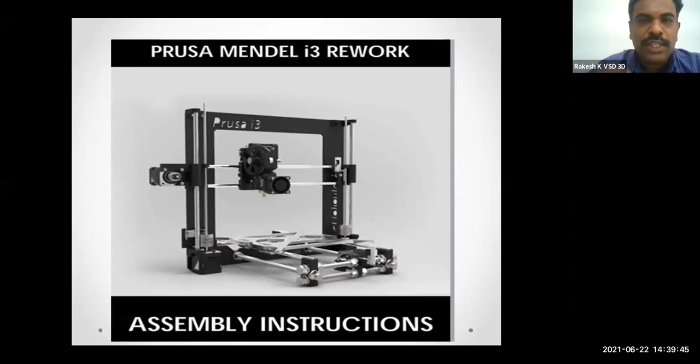We hope my screen is visible to all. This is a Prusa Mendel i3 rework assembly, a Prusa i3 printer which I am going to show step-by-step so you can manufacture it yourself. This is a very simple procedure. Some parts have to be manufactured using another 3D printer, and some rods or other components you are seeing can be manufactured through CNC, cutting machines, or lathe machines. There are some frameworks which we have to manufacture.

The picture we are seeing right now will be the final outcome which we will be manufacturing. This is a very slow process, not an interactive one. We get the parts, take them, and assemble them, and each assembly will have its own importance in the 3D printer system. So follow the step by step procedure with keen attention.

Just to understand 2D to 3D: you have all seen 2D printers like an HP printer. You print one Word file and get an output. If you print the same file again on the same paper, imagine one more layer of printer ink being added upon the previous layer. Layer upon layer increases like that to form the object. So the ink layer increases and forms the object.

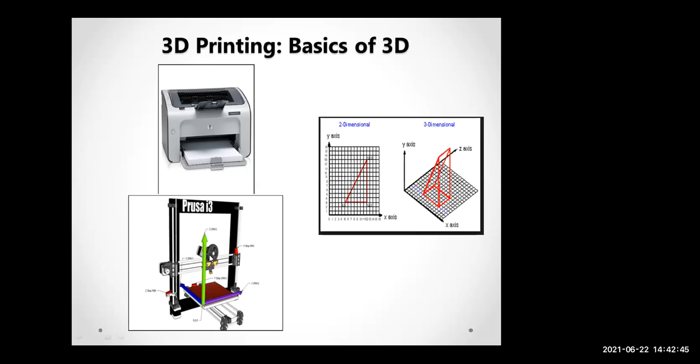If you see in the screen as my mouse moves, once the raw material wire is inserted into the nozzle side, this motor pushes the material, and it forms the object. So there are X, Y, Z axes, three axes I'm talking about, and the fourth axis is the extruder motor.

All these axes, X, Y, Z, and the extruder motor as the fourth motor, are connected to the connecting rods. You can see the connecting rods in the screen. All these connecting rods and NEMA motor movements are coordinated to the Arduino motherboard, in the electronics. The material and all of this in combination will be connected to the motherboard. So each axis has one motor and one extruder motor, and all of this combination connects to the Arduino motherboard.

So this complete process, the X motor, Y motor, or Z motor, in a very simple way we divide these parts into mechanical parts, electronics parts, and also motion related parts, meaning movement related parts. All these parts in combination will help us develop one printer, and like that we will finally get the 3D printer in production.

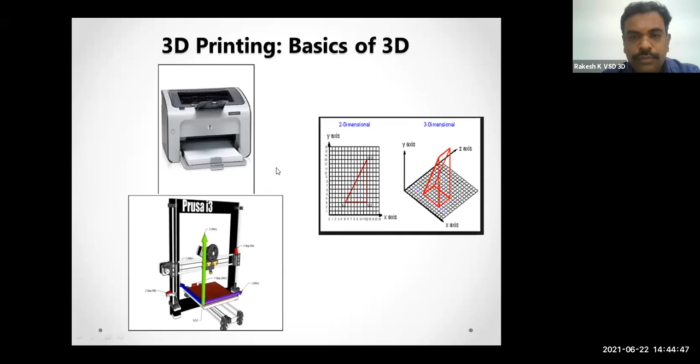So just to start with, this is a simple Prusa i3 3D printer. This version is a very basic version. I have selected this one because if you understand the basic 3D printer, you can automatically and easily understand any 3D printer globally.

You see the X-axis motor, Y-axis motor, and Z-axis motor, and these axis motors are connected to the motherboard. You will also have the bearings, and this bearing assembly will be connected to the nozzle. So that's the sequence you'll be having.

In this version, the features will include the magma hot end, idler tensioning systems, idler end stop holder, and upgraded extruder idler. There will be certain small parts like this.

So here again, same screen, X, Y, and Z, the three axes I am talking about. Just keep this picture in your mind, because I'll be coming back to it again and again as we go step-by-step through which part we are manufacturing. In this screen, I am going to tell which part right now we are manufacturing.

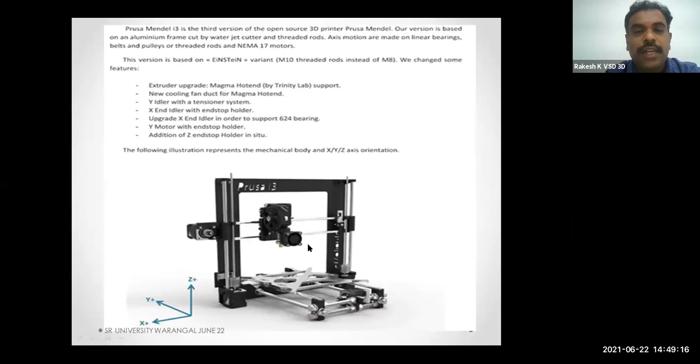One is the 3D printed part, second is the extruder set part. What is this extruder set part? In this, we have certain regularly available parts and some 3D printed parts. The 3D printed parts are the Wade extruder body, extruder idler and fan duct, Wade small gear, Wade big gear, and this one.

Again, the magma hot end, thermistor and resistor, hobbed bolt - these are regularly available in the market, where you can purchase 8mm diameter smooth rods of 320mm, 350mm, and 370mm lengths. If you go and ask, they will give you these.

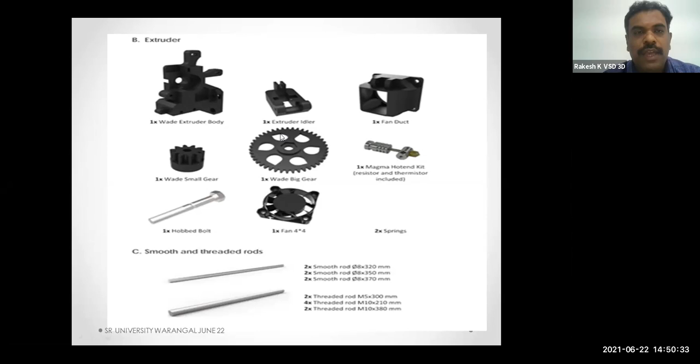And also you will be having the threaded rods of M5, 300 mm, 210 mm, and then 380 mm. Like this, each and every assembly which we talk about in this sequence, this is called bill of material.

In our regular process, before we manufacture our printer, we set up what all requirements are there. If you come to the next assembly, the set of parts we talk about are bearings, couplings, ball bearings, NEMA motors, belt, GT2 pulley, and these are one more set of parts which we buy, not manufacture, and these parts are required as an assembly system.

Each and every part has to be fitted equally. Like this, we have a set of parts which we have to purchase. In regular mechanical market only we will buy, we can get all these parts. So nothing is something new you have to buy, everything is available in the market itself.

LM8 UU linear bearings are regularly available. And if you go to the coupling, 5 to 5 couplings are always regularly available. Ball bearings number 624, 608, and NEMA motors, which are regularly available in the market. So like this, you have to purchase these materials also.

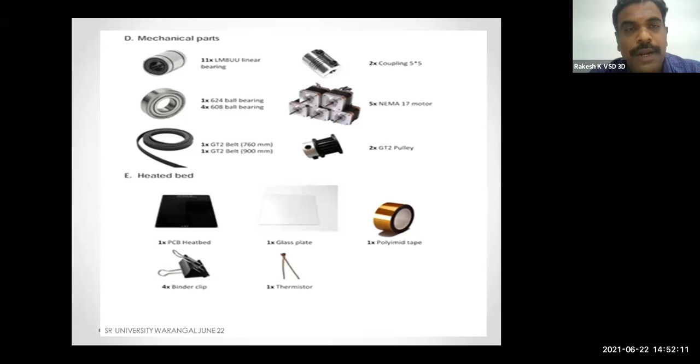And next one is heated bed, where your 3D printed component will be 3D printed. So you see, for the heated bed, we have only very few simple binder clips, polyimide tape, thermistors, glass plates, and PCB heated bed. Like this we have. So these are regularly available parts.

These are the stoppers which stop the printer from moving in the x-axis, y-axis, and z-axis. If it is rotating continuously, somebody should stop the motor to stop at one point. So that is end stops, or connecting rod, connecting cables, which we need to purchase.

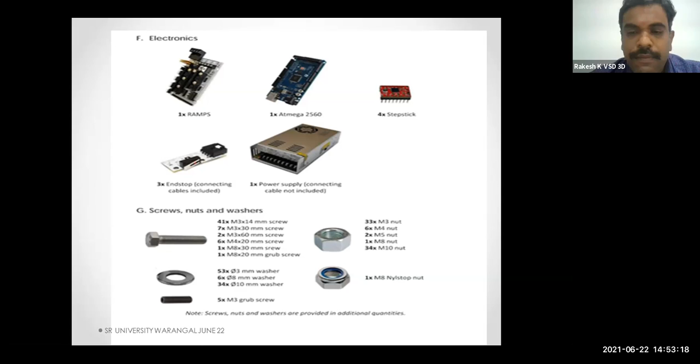And next one is power supply. This is a normal power supply, we take it from regular systems. And next is screws, nuts, and washers. Regular mechanical guys know well about it. These nuts, before we start manufacturing, we keep ready in step-by-step procedure while we will be taking this usage in our process of manufacturing a small 3D printer.

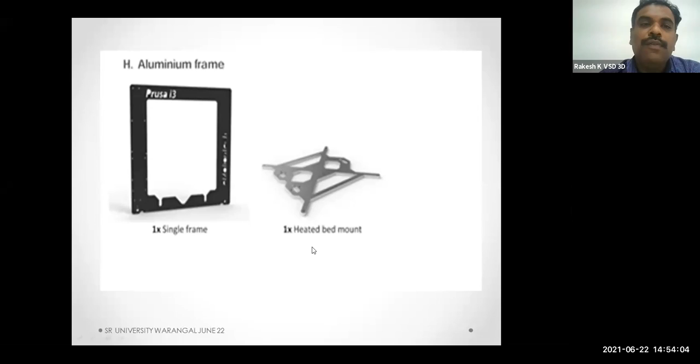Next one is, this one is aluminum frame, students. Aluminum frames. These aluminum frames can be purchased directly, or these can be manufactured using lathe or CNC turning machines, where we can take that particular frame and ask them to design as per our thing, meaning they can cut as per our design. So like this, aluminum frame, single frame, and then heated bed mount, which we get from the regular market itself.

Fine, so now students, we will go for FDM. Sorry, I'm telling you students, we'll go for regular sequences: y-axis, x-axis, z-axis, and then extruder motor. We will add the sequence slowly. So we will develop, because we are assembling one part by another part, we are going to take it up.

The images, I tried to give you as much quality as possible, but still we have this issue, I don't know, because it is an image, a PDF file which I have converted. I got it like this, so I'll try to show you the images as good as possible. If you follow the images, you understand what exact part we are working at.

Okay, first and foremost is y-axis. Why y-axis? Y-axis is the one which is bearing the complete 3D printer. So behind, I have my printer with me. I'll be showing you what this printer is all about, and also I'll try to show you this printer to make you...

...clearly visible. So first of all, I am talking about this x-axis. Okay, this is x-axis. This x-axis, this is one top-end model, that's why everything is closed here. If you see, there will be one frame beneath.

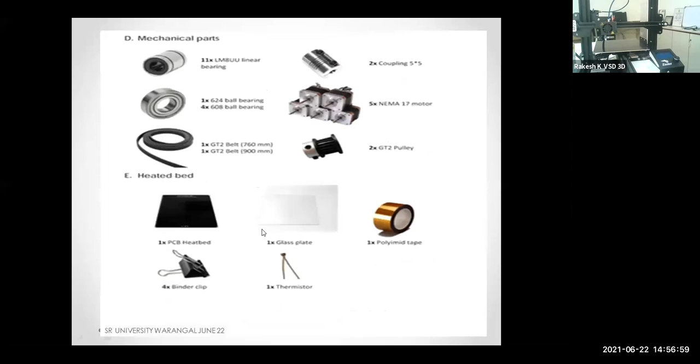This document which I am showing will be taking all the parts which I have discussed from this BOM only. In this, it has taken the heated bed, this frame, and this heated bed mount. On that we have added the Y belt holder, which is this one, getting fixed. And then you have the Y belt idler also. In this sequence you can see the Y belt holder, and also this Y belt axis thing, which we will be fixing.

First and foremost, frame, and on that frame we have fixed the part. And next, transverse. See, in the printer which I am showing, this is bit closer to a printer. So this is a semi-assembled printer. Actually this is called an Ender machine, which you are seeing.

This will help you understand better. If you see here, you will be having this motor. This is the Y motor, and this is the axis. So here the Y axis will come and touch here. That's it. There will be an end stopper which will stop this from going beyond this point.

So you will be touching it and then it will be stopping. So there will be an end stopper here, and also an end stopper here. Two end stoppers will be there for the Y axis. This is Y, this is X, this is Z.

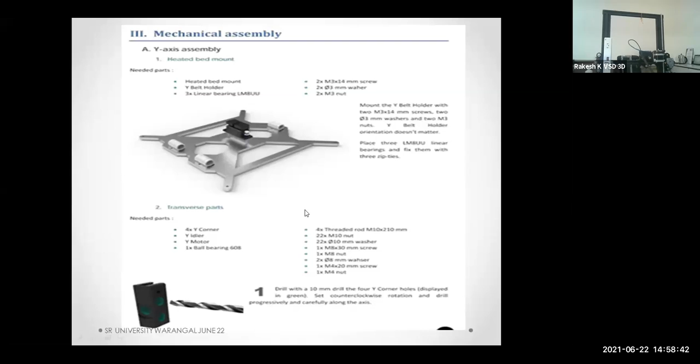So this part which I am talking about, the transverse parts, this transverse part is the one which will be coming at this level. Just to make you understand more, I am going to the next slide.

See, we have these black ones which I am showing in the image, already 3D printed. Those parts are readily available. In that readily available part, we are just fitting this M8 and M4, M4 nut, and also the 608 ball bearing is being fixed inside this particular part.

If you see where this part comes in the printer, it will be coming beneath the printer. This side you will be getting it, this side you will be getting it. So after this, there is one more.

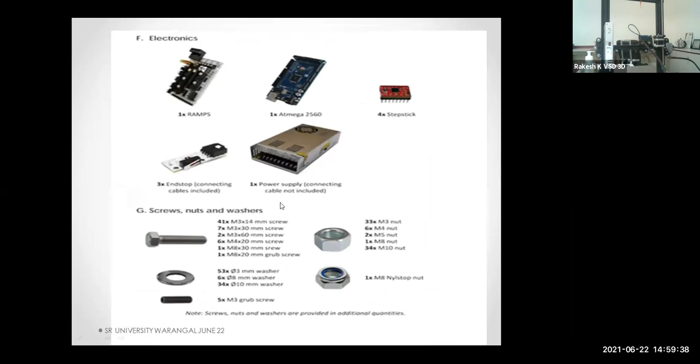These rods, if you see, we have multiple rods being developed. So each rod, after this, we are going to get our rods which I told you now. In these rods we have smooth rods and threaded rods, which I have shown you in the BOM.

That particular rod will be inserted into these parts. This idler, and then the Y bolt will be tightened, and then we'll be inserting and fixing this with a certain distance of 30mm. Why 30mm, we'll come to know in the next step, because when the printer is moving it needs to be fixed with this frame also. If that frame is required, we will use these rods with certain distance, and lock the nuts. So after that step, we are adding some more parts into it.

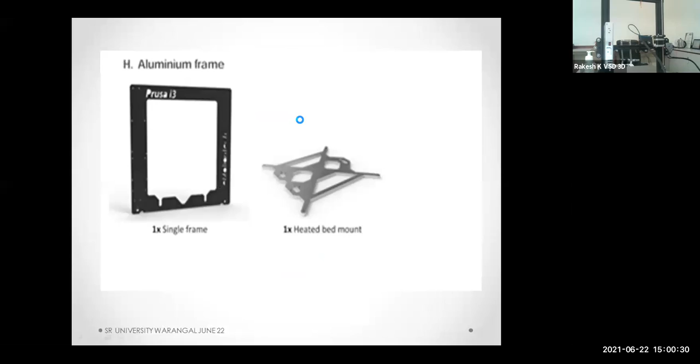Some more part is this one, which we have discussed in the 3D printed first slides itself. I have shown you these parts. This is the one, Y motor controller. This part, next step we are going to take.

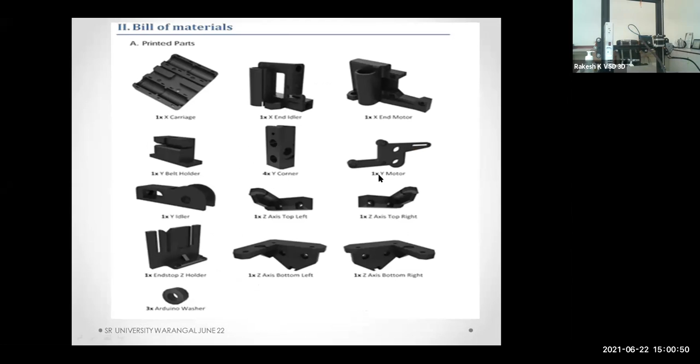First we have taken the belt holder, next the Y corners, we have fixed it. And then the Y idlers, we have fixed. And then now we are fixing the Y motors. And then you see the Y motor here beneath.

This setup which we have done here is different, and this which we have done is different. You can see this side idlers, and then we have this complete idler. So this one set and this one set, two sets we are talking, not a single set.

So what next? We have to take these rods and maintain a certain distance. How can we fix these rods? I have given you two particular ones, in the previous slide you have seen, we have developed two rods that are transverse slots, and they will be in the horizontal direction too.

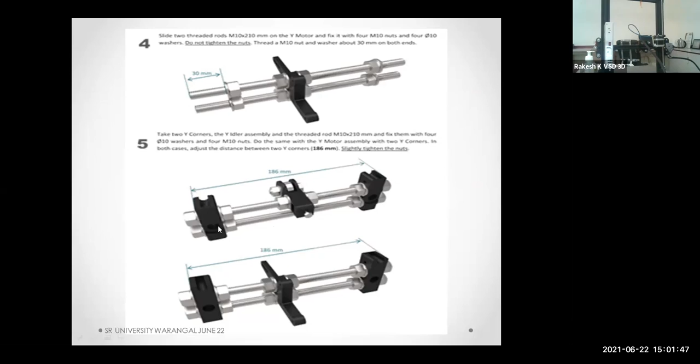In the two horizontal directions you have seen, and then some rods will be going in the perpendicular direction. You can see in sequence 5 here, whatever we have taken in the rods, we are now fixing the perpendicular rods. These perpendicular rods, first it was developed like this, now we are fitting like this, these two rods.

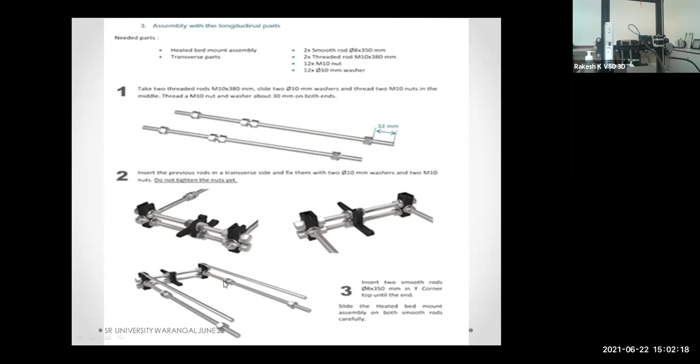These two rod sets become our left side of the screen. You can see the rods being fitted, and finally our frame which was developed on the first line, that is the frame beneath the printer which I have shown you previously. This frame, where your heated bed is moving, this small frame is beneath it. Internally we will be having one frame.

This frame is fitted on the complete axis. This is looking a bit different, this is a semi-assembled printer, which I am showing you for your understanding, to make you understand what I am telling. The Y-axis assembly will be looking like this.

This is how the complete Y-axis looks, because this Y-axis is the base area which will be taking the complete load. That's why Y-axis fitting is a bit complicated, and your transverse rods should be into the exact position, or your parts may get cracked if the system is not fitted properly.

So this is the Y-axis assembly. As I told you, first is X-axis, second is Y-axis, next is Z-axis, and I'm going to integrate each part, and then finally you will get the printer out from that. So the sequence follows from one stage to the other stage. So like this, you have already seen the Y-axis.

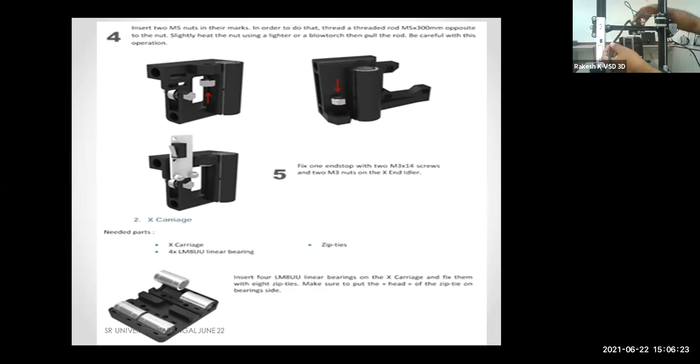In X-axis, we have our carriage also, where I told you about the carriage system. This part is fitted to these particular rods. So this carriage system, whatever you are seeing, this is just for your understanding, I am showing through video. This carriage system is there in X-axis, so in X-axis we have to fix this carriage way also.

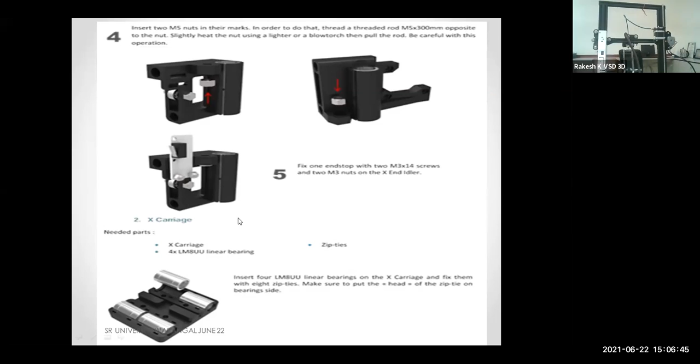This carriage way, if you see, contains the complete carriage and also 4 LM8UU linear bearings. This system is different, but in this system, the X-axis manufacturing will be like this. As I told you, X end idler on this side of the part, and also X end motor assembly on the other side. This side you have the motor assembly, and this side you will be having the end idler assembly. So motor on one side, idler on the other.

So how these two will be manufactured is, you can see here, X-axis rods, in the first sequence itself I told you, you have to maintain the dimension of 345 mm. In between, we give this carriage system, and the sequence given is 1, 2, 3 for the carriage.

After this first end idler assembly is done, then you have to add the carriage. Afterwards, after the carriage, you have to get into the end motor. So these three are in sequence in our X-axis, because as I told you about X-axis and Y-axis also, this sequence has to be followed. And finally it will be fitted to the system, where the frame will be fitted to the parts.

Next, the frame will be fitted. In a single frame, we will be having the x-axis assembly, and we will be having the z-axis top and z-axis bottom.

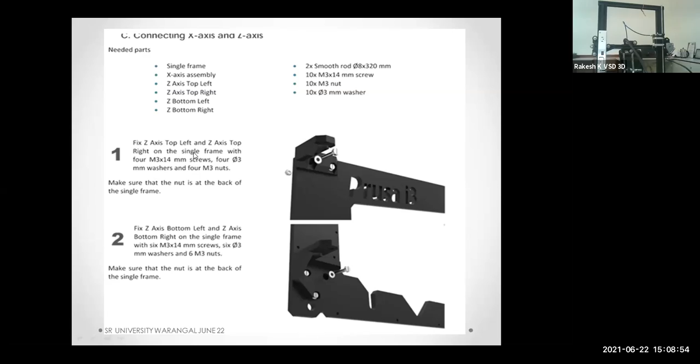These two, z-axis top or z-axis bottom, we fit like this. If you see, like this, it will be looking.

From the left side, we see - don't imagine this is semi-assembled. As I told you, what I am sequencing is the assembled, step-by-step assembly. This is a semi-assembled printer which I am showing for your understanding. So these two rods are fixed right now.

The Z movement axis motor will be moving this Z axis from top to bottom. There will be an end idler and also an end stopper. These two will be connected, and the rods that are there will be connected in this sequence in the Z axis.

If you see here, this Z axis, you will be having the coupler assembly. What is this coupler assembly? In the Z axis you will be having the end stop Z holder, couplings, NEMA motors, threaded rods, and even screws, nuts, and washers.

You may feel this Z axis is very easy, but the most critical thing is the Z axis is very tough to handle, because the alignment should be very parallel or perpendicular. If the coupler or these parts are not parallel or perpendicular at 90 degrees, the printed parts get cracked, tension increases inside the parts, and there is a chance of collapse of the complete printer.

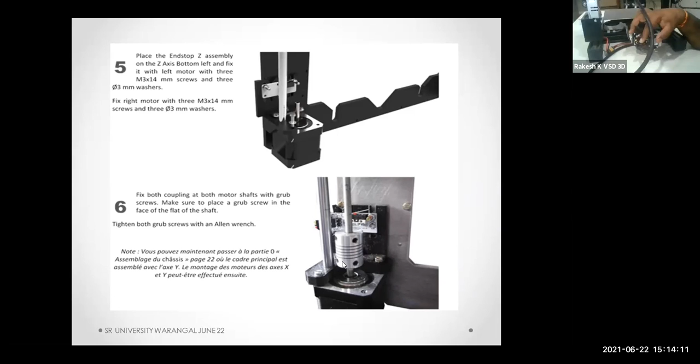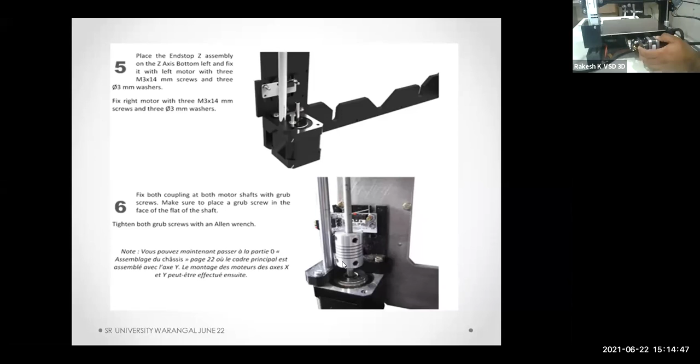So like this, motor movement is controlling the axis. Are you able to see this motor movement which I am talking about? The axes, the motors will be connected to the belts, and belts will be controlling the axis movement. Okay, how do we do this axis movement? Next, what we have to see. Fine, okay.

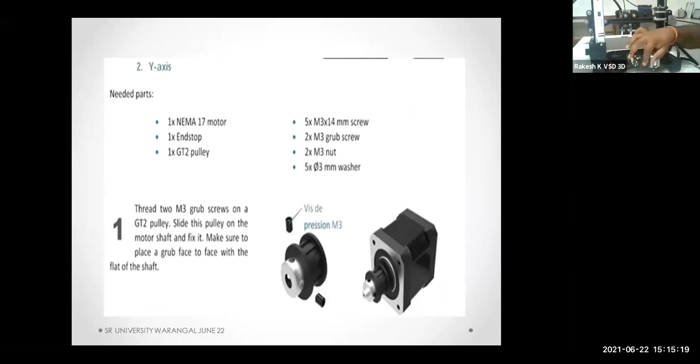As I told you, this motor will be connected to the small grub screw, and the grub screw will be connected to the belt, like this it will be connected. So that's why, as I told you, same image - this is the motor, and the motor will be having the grub screw. So we fit these two together, and after that this will be looking like this.

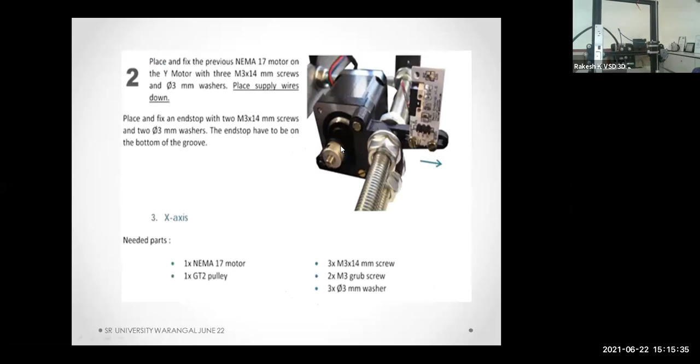And then these motors, X or Y axis - so each axis I'm telling about now. Y axis, first we have seen the Z axis. Z axis motor we fit, Y axis motor, NEMA motor we fit, and then finally we fit the X axis motor. This is the one which will be controlling the complete movement of this particular axis. This is extra motor, don't get confused. This is the motor which will be rotating.

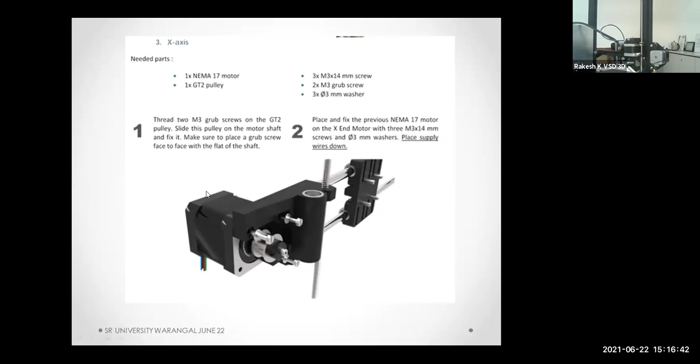So this is the x-axis, which I am showing in the PPT and also the video. Okay fine, so this is x-axis, and next one is the complete things which we have fitted - x-axis, y-axis and z-axis, these three which we have fitted. Now we are going to keep everything into the frame, and finally the picture will be looking like this.

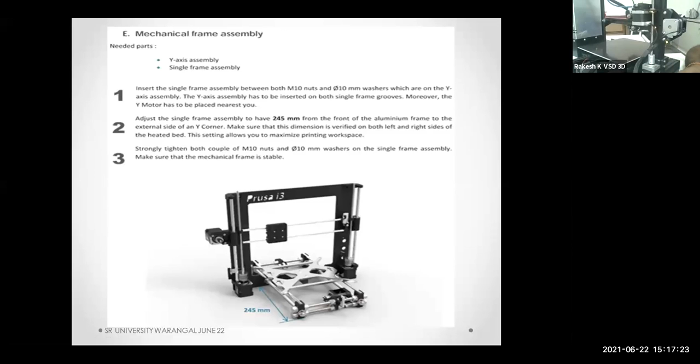So for x-axis, at first a small parts assembly sequence, and then afterwards the next part is the motor fitting. So x-axis fitting, y-axis fitting, and then finally we go to the next final frame which we have prepared. All these three axes will be fitted to the frame. What next do we have to do?

As I told you, the frame belts will be connected, and those belts will be moving the carriage, and the motors will be connected to those particular belts. That's why the motion will be there. That's why the x-axis belt will be connected to each other, and this is the x-axis belt which will be moving. It is in between - this is, as I told you, a semi-assembled one. We'll be having it inside of this frame.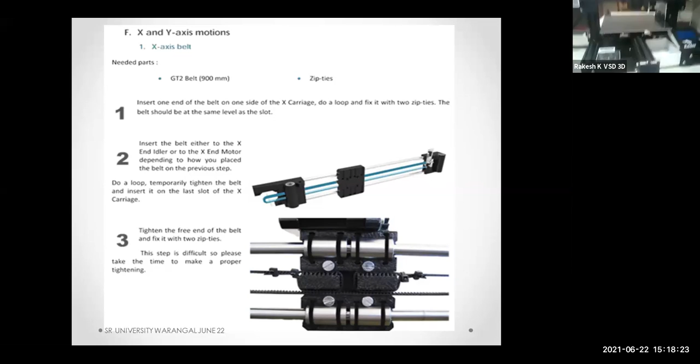When you go to the y-axis, we have this belt moving here. You will have this belt connected to the motor backside. Okay, fine. So x-axis you have seen, y-axis motions we are fitting it. Where this y-axis I have shown you, and we will be talking now about one more area - the bed. This is the bed, this is what I am talking about.

See, this is a simple combination of 4 to 5 parts actually. How will it be? Just see the screen here. There will be a glass plate. Beneath the glass plate, we assemble this small thermistor assembly, which will be having these thermistors - what do you see - these thermistors, 2 thermistors, and then Teflon wire. This is the Teflon wire, which we assemble together beneath the plate like this.

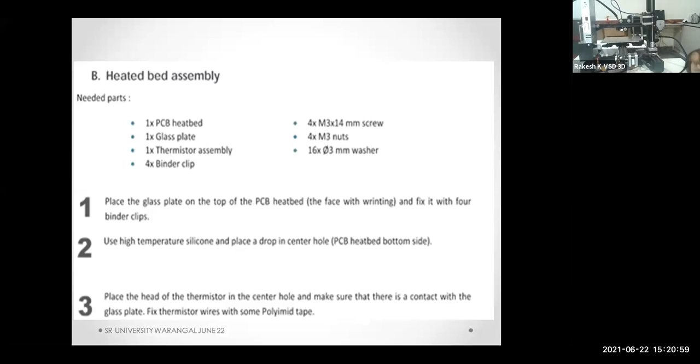Okay, this happens in this sequence. So as I told you - X, Y, Z - and then giving the motion to the x-axis, y-axis and z-axis. After taking the z-axis, the next one is heat assembly. Heat bed assembly, as I told you, we will be having thermistors, and thermistors will be getting the heat sensor, and also the temperature will be increased. After a temperature increase, it will be cutting off after a certain temperature like 100 degrees or 50 degrees. So like that we will be manufacturing the heat bed.

Fine, everything is ready. What about this nozzle area? What about this nozzle area? This is the heart of the 3D printer - the complete system moves around the nozzle only.

You see, this one is very sophisticated. That's why it is looking very smart. Very small one, and it is looking very smart.

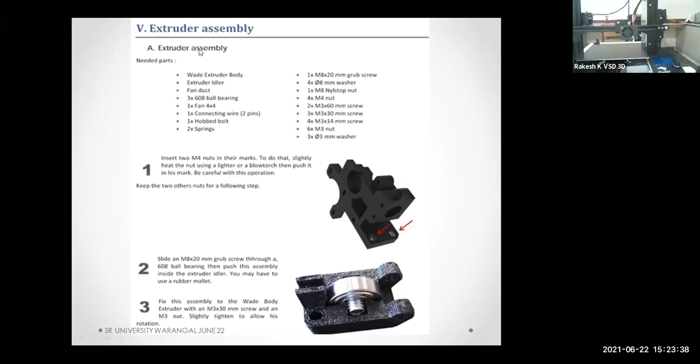Is my net coming, sir? Yes, sir, but it is slow somehow. I'm stopping the video streaming, I think it is unstable now. So I'll open the video as and when required.

If you see this, the complete extruder assembly, whatever we are seeing here, this complete system, this part I am talking about, it is very complicated. We are going to go into a sequence of how we are going to take this.

See, this part we are going to house so many parts, all parts which you are seeing now on screen, like Wade extruder and everything. If this part's step-by-step procedure, if you see here, you will be having a ball bearing. This ball bearing is in-housed into this particular part only. So this ball bearing you are in-housing into it.

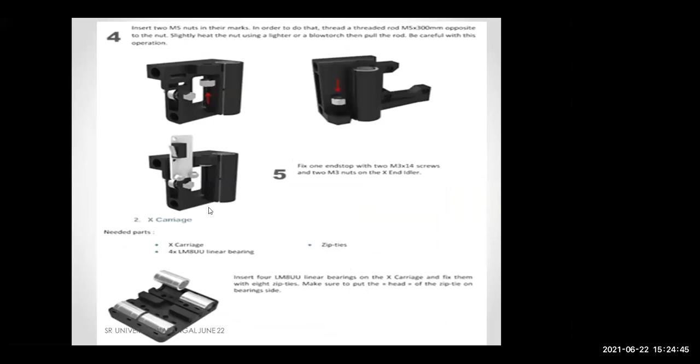See, in the view which you are seeing, we have multiple parts, right? Just we have assembled a few parts. If you see here, Wade big gear - I'll just go into the first screens to show you the extruder set assembly printed parts. So just have a glance at which parts are going to be assembled now.

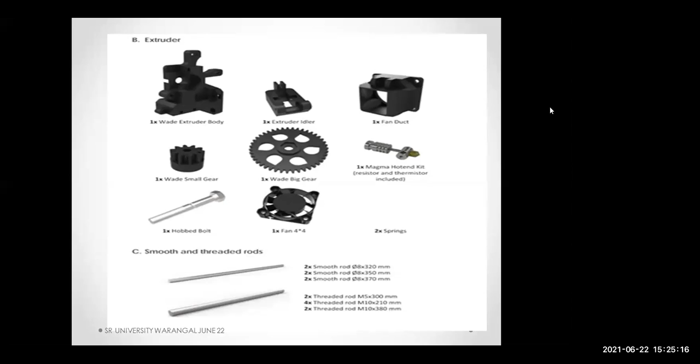Each has 1, 2, 3, 4, 5 - 5 are the 3D printed parts. Remaining are all BOM parts, meaning which we are purchasing. So these parts only now I am manufacturing, meaning step-by-step procedure we are fixing it. That's it.

This part - if you see this screen, first we have assembled this M8 20mm grub screw through a 608 ball bearing, this one. And next is fix this assembly into the Wade body extruder. Wade body extruder is the big one, this Wade big extruder. And next one is inside this - first sequence is we are fitting these things, and second sequence is we are fitting this 3 into 8mm dia washer, which will be fixing this Wade gear.

Actually, what I am talking about in 1.5 hours is a project of 30 to 40 days. They work step by step procedures, not in 1 day or 2 days can we do it. This is a cream which we have grabbed, and we have created this document with so much experience and so much effort. We have developed this document. It is not so easy - what I am talking in 1.5 hours, you can develop this 3D printer.

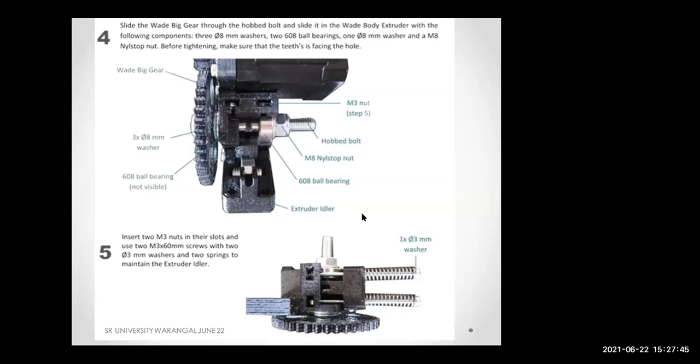Fine, so everything we first manufacture the setup like this.

Once this setup is ready, we have to mount the extruder motor. Also, we have to mount the fan, which is not a manufactured part of the 3D printer. It is a separate housing which we have to make as a major part of the 3D printed part. On that only we have to house these parts.

Nozzle set - what is this? On the left side of the image you have the cold end where your raw material wire will be moving, then the rod where it sequences the material into a straight line, and next is the hot end. The hot end is where the thermoplastic material will be melting, forming into a liquid or glossy stage, and then that material will be pushed into the nozzle, and the nozzle will be delivering the material out.

So who has to push the material? The motor. That's why the motor will be there on the upper side of the system. And who has to cool the extruder end? That's why the fan is fixed at this point. Once the material is pushed from the top side, this fan will be cooling the extruder hot end to the right temperature, and then the nozzle will be extruding the material, and the material will be getting solidified.

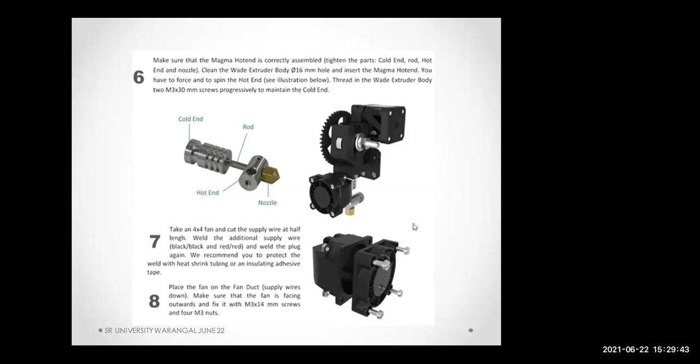So this complete setup, finally we fix the hot end and also the fan along with the extruder motor. These three are fitted at the end of the sequence, so that the complete internal part hosts the complete setup. Apart from this, this complete setup which you are manufacturing has to go into the driveway or x-axis guideway.

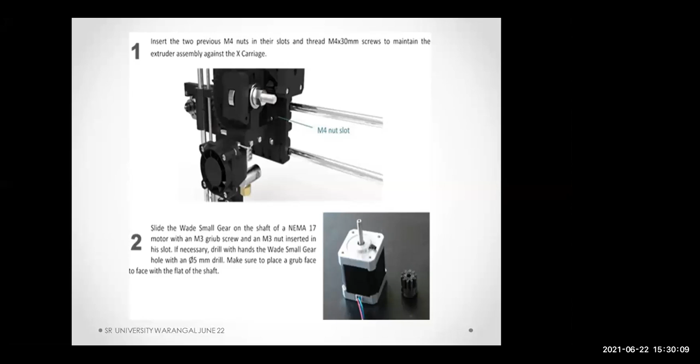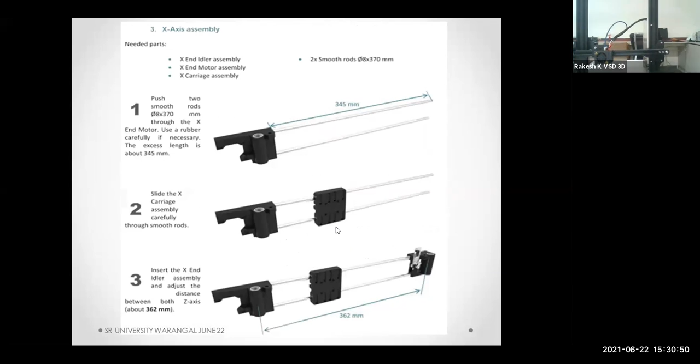So onto this x-axis guideway, we have to fit this complete extruder. This complete set of extruder has to be fixed on the guideway. This guideway and this setup has to completely sit on the x-axis area. So this carriage which we have fixed in the x-axis assembly, this carriage has to host the complete extruder set.

So onto this extruder set, we have to fit the part like this, so that the complete holding, carriage holding, and everything, the load is being taken. So this complete setup of the extruder will be going and sitting on the carriage. Once this carriage is fitted with our regular screws only, it is not a big deal.

But while we are placing the motor - the motor will be there with the raw material going inside. Here you will be having the pulley pushing the material. Once your material is coming like this, it gets pushed like this, inside, and the material comes down.

So as the material comes down in a line from the nozzle, the system should not have high tensioning, nor should it be a loose system. Precision matters at that point, where your material has to go exactly, and the flow rate concept comes into play, where the flow of material has to be controlled at a particular level. The material will be pushed by the extruder motor using our internal Repetier-Host or any 3D printer slicer engine, which we use for our slicing operation purposes.

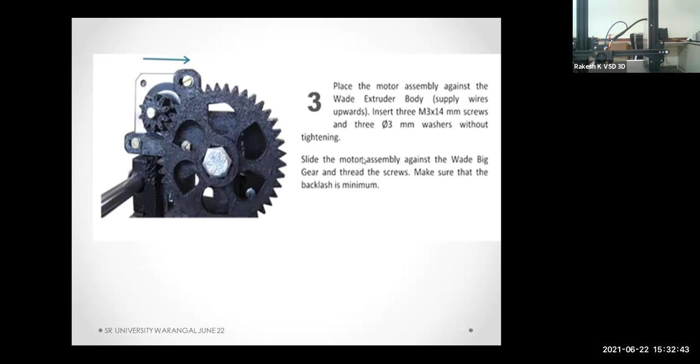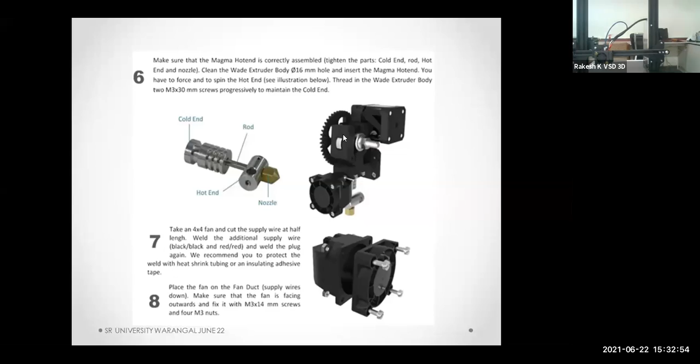So if you see in this assembly, where the material is inserting or pushing, you see from here it is coming in. There will be a small hole where your material will be inserted, and a small gear and then the big gear both push it into the nozzle set, where you will be reaching that particular material.

And how do we get the power to it? A resistor. A resistor - electrical pulse will be generated, and due to the electric pulse, once this induction happens, the heat increases, and the temperature of that particular hot end increases gradually.

As the raw material which we use in our 3D printing is a thermoplastic material, it touches that particular area and liquefies, then comes out of the nozzle slowly, as shown in the figure. It comes down, heated into a liquid stage. The liquid stage comes down due to pressure and gravity, comes out of the nozzle, and layers on the build plate as per our design, whatever we have given in ANSYS, CATIA, or ProE or any other software.

And that particular software will work as per the dimensions or as per our regular inputs which we have given at the slicer level.

So whatever we've been talking about right now was completely about the mechanical assembly. The complete mechanical assembly was discussed, where all mechanical parts were assembled sequence by sequence, and certain parts can be bought from the market and assembled in a sequential way.

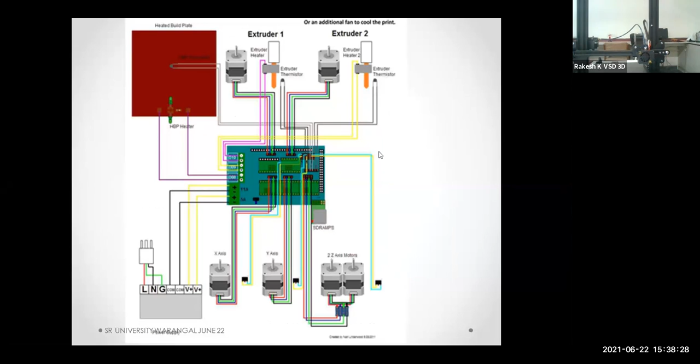So we have connected the X motor, Y motor, Z motor, and also connected the heated bed and everything.

What if the motor is rotating continuously and nobody can stop this motor? How can we do that? There should be a stopper, called an end stopper. The end stopper is the component which gives a pulse or signal to the motherboard to stop at that particular point.

See, here it's going up to this point, and if you see the motherboard, there will be a small stopper here. I don't know how much it is visible.

I'll try to give you maximum. Okay, this is the one which will be...

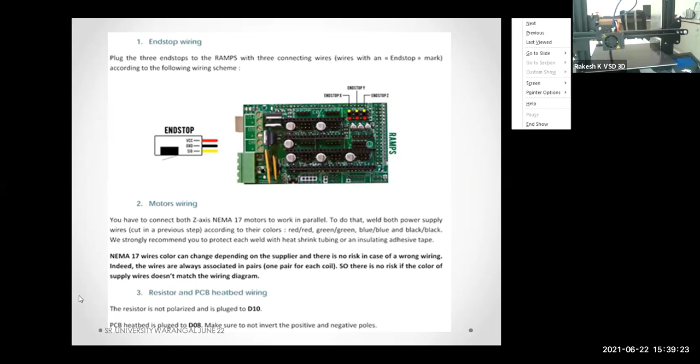This motor is going like this, and then it is stopping here. Why is it stopping? Who is stopping it? This motor is asking it to stop. This is maybe a controller stop, or a machine stop, because the motor will be rotating continuously and it doesn't know where to stop or end. There will be an end stopper. The end stopper's main role is to stop the printer in that axis up to a certain stage.

So end stopper connections are also important in the motherboard. In the top right corner of the motherboard, you will have end stopper for X, end stopper for Y, and end stopper for Z. These three stoppers will be stopping the X axis, Y axis, and Z axis, so these axes will also be connected to the end stoppers. These are the end stopping wiring connections. There's no need to overthink it, but we should have an idea of the complete wiring in the system.

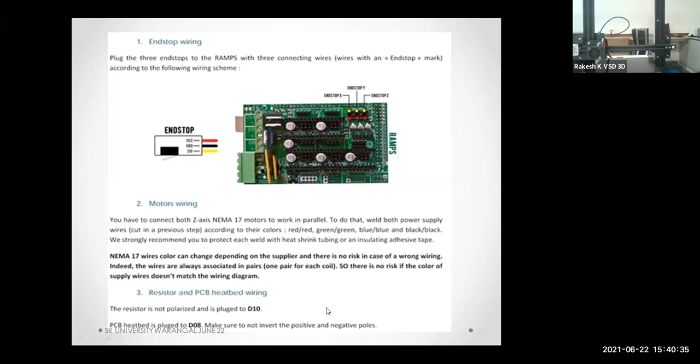Next is motors. The motherboard motors will be connected to the wiring diagram like this, and you have one more in the extruder part. In the extruder, there is one fan which cools the system. That fan also has to be connected to the motherboard, so the wiring has to be given at that particular point you are seeing on screen, a red color point where the extruder fan will be connected, and that fan will be operated as per our slicing sequence and the temperature sequence as per our generated G code.

So next one is power supply. Power supply is positive, negative, simple thing, as I told you.

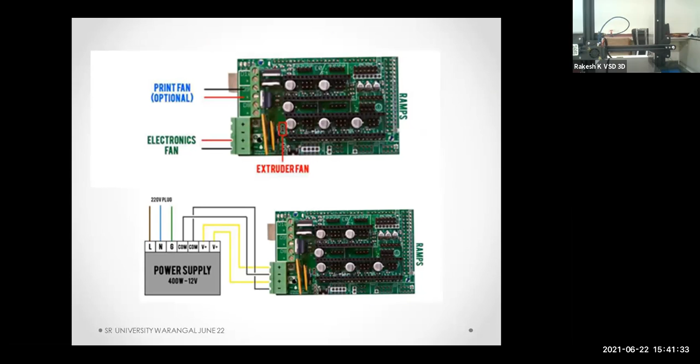So I've discussed the complete components of the 3D printer, from X-axis, Y-axis, Z-axis, connected to the motion systems, electronics, motherboard systems, and the nozzle set we manufactured from the start of the discussion. Simple thing, everything you are seeing is the complete hardware assembly we have done. But always remember, there should be a sequence like this.

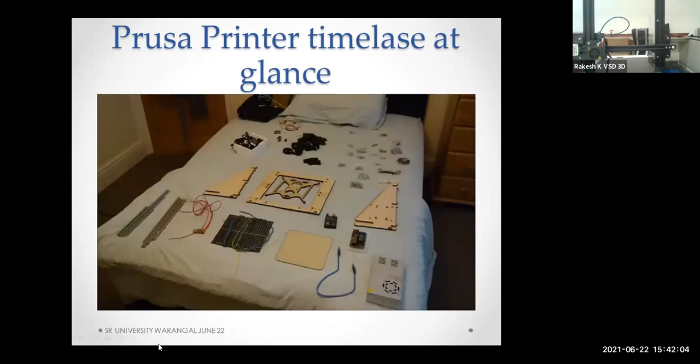Before this, I'll show you a time-lapse video available for you, just to understand how all these parts I have discussed are fitted. Here we have a wooden frame; previously in our system it was an aluminum frame. That is the only difference we have.

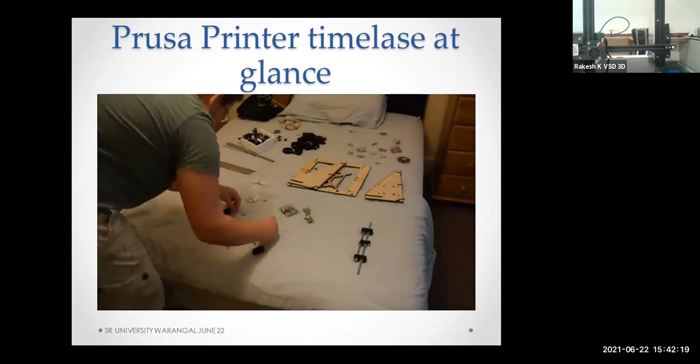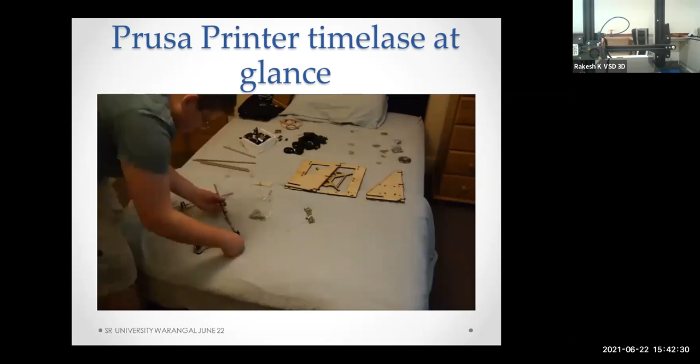The same thing I have done, in the same sequence, this guy is doing. He is fitting the y-axis, the complete y-axis, now fitting the y-axis frame. That frame is given the complete distance and everything is fitted on the frame, and then he starts.

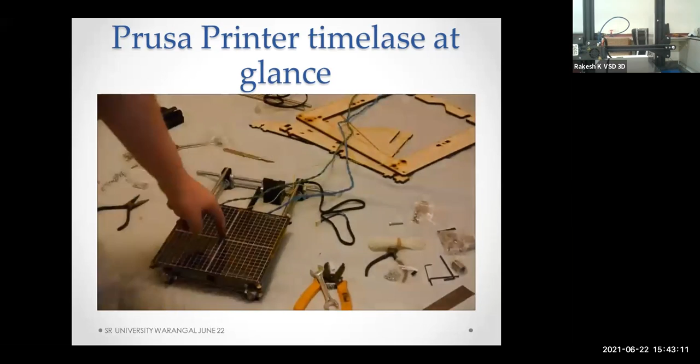This is heated bed, he is fitting it on the y-axis. He is fitting the wiring system and setting up the frame.

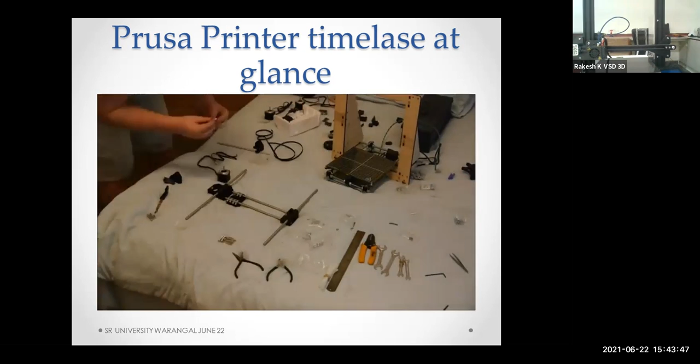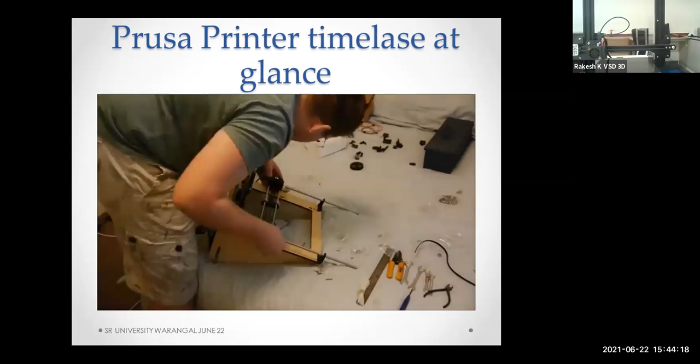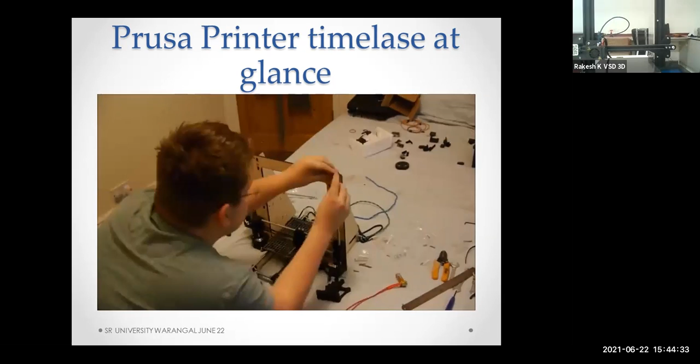Now he's putting the x-axis carriage assembly, fitting the carriage, z-axis carriages, couplers, carriage for the x-axis and z-axis, both he's fitting up. Now he has fixed the x-axis and also fitted the z-axis. He is fixing the belts for the motion.

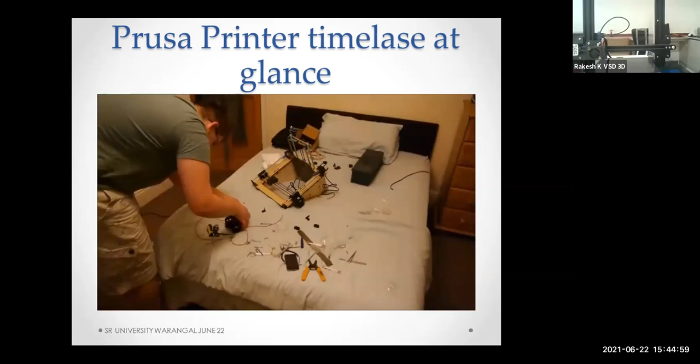Now he is fixing the complete extruder set.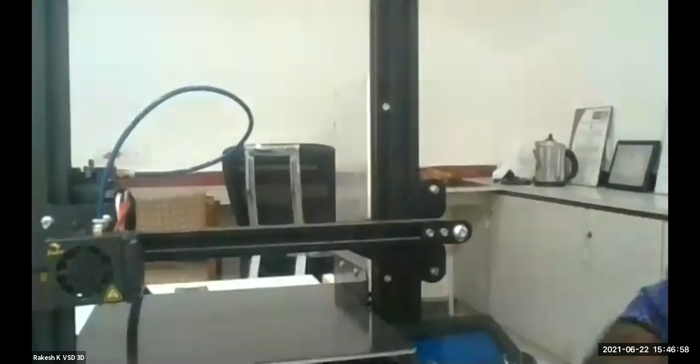Rakesh sir, I think your voice is not audible. I think you are on mute. Now, ah, okay, now okay. How much time was it? This is 3:45. No, no, my mute was on for a while, only for a few seconds. Few seconds, sorry, okay.

So whatever 3D printer software you have, like Creo, CATIA, ANSYS, you save the file in .stl format, and in that STL format you will be working, but that is software. This is hardware. How to integrate these two? That is a challenge which we have in the complete process of 3D printing.

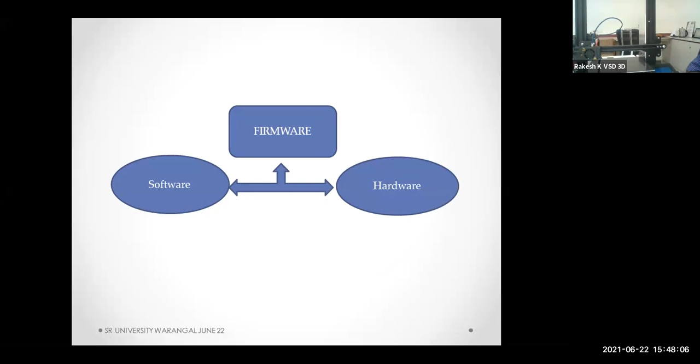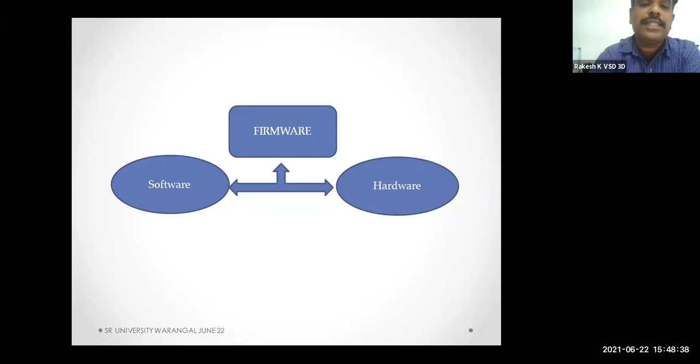So here the firmware is the one which will make you understand the software you have designed. That designed file will connect to the hardware to work upon it. There is a middle language, or firmware, which transfers your software G code into the hardware and asks it to print. How does it know it has to print that particular job? This firmware makes it understand by taking the G code as input. From the G code input, the hardware understands that particular software G code, and then it prints.

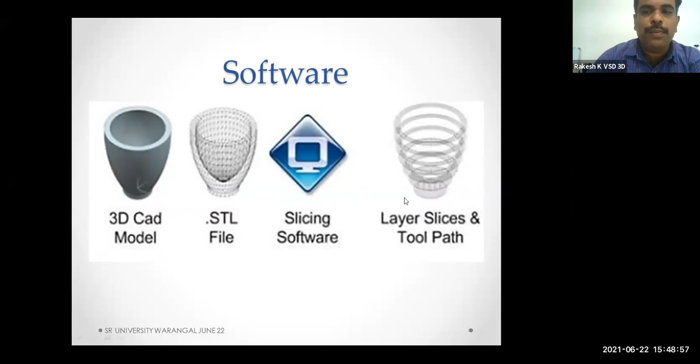So as I told you, there's a simple process followed in all 3D printers: 3D CAD model, STL file, slicing software, and finally the layers and then the path. This is the STL file; up to this you have the software. Slicing path and tool path are generated by the slicing engine. This slicing path, while generating, produces a code called G code.

This G code is the one which will be understood, and there is a mediator which will be doing this transformation of G code, generated in the software, to the complete machine. How it works and how it does.

Right now there are so many firmwares. So I'm just giving a brief information. As a part of the DIY printer, you should have knowledge about it, that's why I'm giving you this. I'll finish the session in another 5 minutes, and then we can have questions on the topics discussed, and other topics too, because I've been in this field for many years.

So firmware, I'm talking about Marlin. What is this Marlin software? It just converts our G code into the movements of the motor. You have seen X-axis motor, Y-axis motor, Z-axis motor, right? The X-axis and Y-axis motor controls just make it go and stand there. The extruder motor pushes the material. That's it.

So the pulses and the movement of the motor are controlled by this firmware only. Just a G code, once it takes into the software, directly connected to Marlin - whatever it is, taking it from the SD card or software - the G code will be copied from the SD card, and that will be converted into pulses.

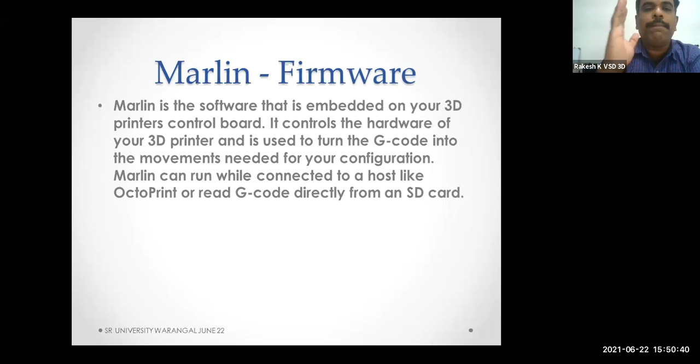What is this pulses? How does this Marlin firmware work? So we have a motor. The motor will be rotating in 180 degrees, and that 180 degrees will be converted as pulses.

If you see the Marlin language, the control language of Marlin is derivative of G code. G code commands tell a machine to do a simple thing, like set heater 1 to 180 degrees centigrade, or move to XY at speed of F. So if the X-axis motor moves, it will move with a speed and go and stand at that particular point. That particular sequence, the print model with Marlin, is just a simple command. How it works is...

Marlin receives a movement command. It adds them to a movement queue to be executed in the order received. This movement has a process called stepper interrupt, which will be moving, making the nozzle, or X, Y, or Z axis, move from one point to another point, and one point to another like this.

So there will be a sequence of events happening. You will be having the pulses generated per second - meaning 80 steps per mm, 50 mm per second, or 4000 steps per second. Like this, the pulses will be generated. That pulses will reach the motor, and the motor will go and stand at the particular point.

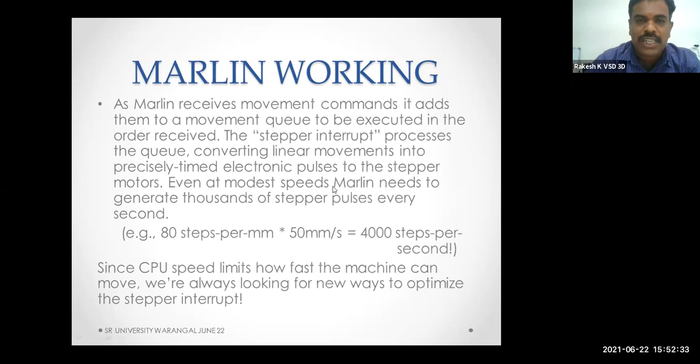We don't need to get into the deep of this, but just as knowledge, Marlin is the one which controls your complete system and transforms your G code into the machine process. So Marlin is the one which controls the complete machinery system - we have sensors, heaters, X-axis motor, Y-axis motor, Z-axis motor, and also a fan in it.

So all these controller events and everything it has, it will try to show back to the user - it will show what is happening inside, which layer is completed, which layer is to be completed, which layer is going to be completed, how much print is completed, and how much is still left out. So Marlin is the interface which works between the G code and the hardware.

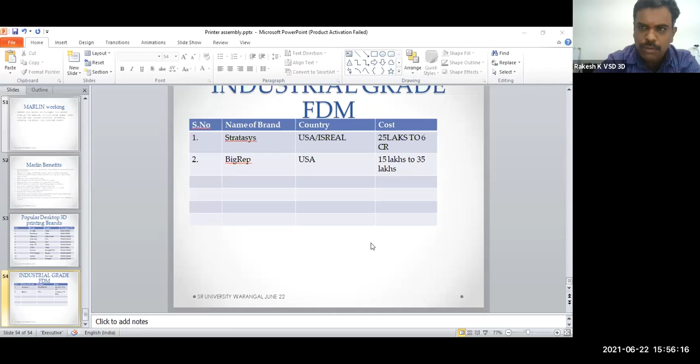Sir, if I am able to explain your question, then that is fine, or else you can unmute and discuss directly with the speaker. Where is that code? I did not see that code in the chat box. I think he has sent that to my personal chat box. Okay, I can ask the participant to unmute, and you can share that code to me so I can just see at a glance.

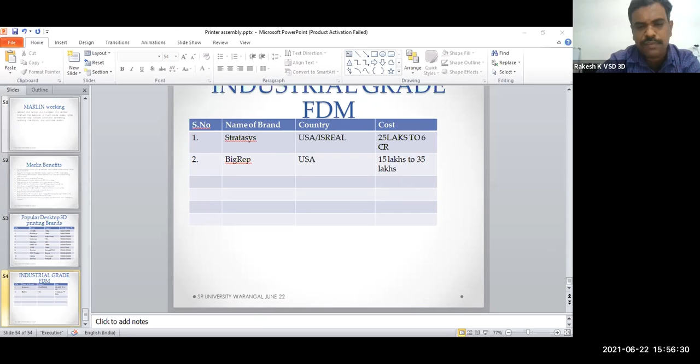Nikhil sir, are you there? You can unmute and discuss your issue. I think he is not present here. Yeah, he's present, I can see he's unmuted also, but he's not speaking. Nikhil sir, Mr. Nikhil P. Vyavahare, please speak.

Hello, is it audible? Yes, yes, it's audible. Mr. Nikhil, hello, is it audible, sir? Yes, yes, Mr. Nikhil, please tell your question. What is the issue you are facing?

Sir, actually, I have designed my own system as per my design concept, and the Marlin software I have also updated as per the requirement. But as we know, there is the Pronterface software in between. So actually that is showing me when it is being started, the system is going to halt. It will show the error, system halted.

And when I personally check the machine control for each of the motors, it is working fine. So I'm not getting where my problem in the machine is.